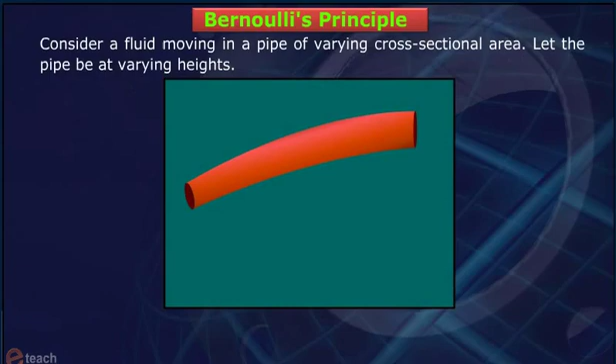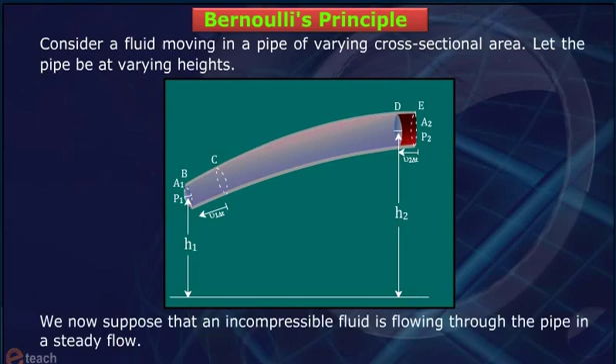Let us discuss Bernoulli's principle. Consider a fluid moving in a pipe of varying cross-sectional area. Let the pipe be at varying heights. We now suppose that an incompressible fluid is flowing through the pipe in a steady flow. Consider the flow at two regions, one that is BC and two that is DE.

Let fluid initially lie between B and D. In an infinitesimal time interval delta t, fluid which is initially at B with speed v1 has moved a distance v1 delta t to C. v1 delta t is small enough to assume constant cross-section along BC. In the same interval delta t, the fluid initially at D moves to E, a distance equal to v2 delta t.

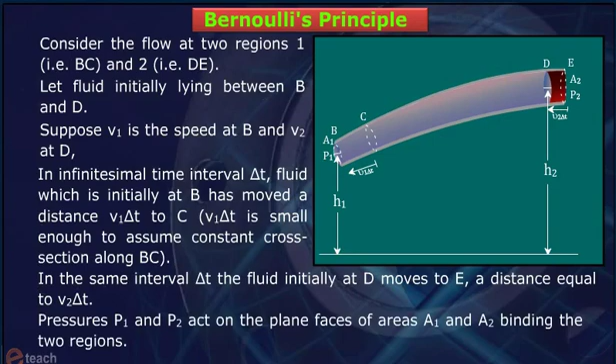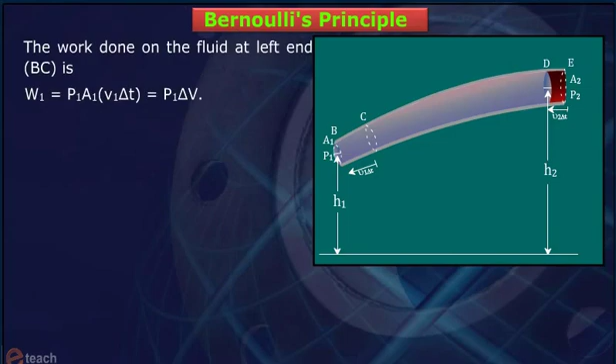Pressures P1 and P2 act on the plane faces of areas A1 and A2 binding the two regions. The work done on the fluid at left end BC is W1 = P1 A1 v1 delta t = P1 delta V. Since the same volume delta V passes through both the regions from the equation of continuity,

the work done by the fluid at the other end DE is W2 = P2 A2 v2 delta t = P2 delta V. So, the total work done on the fluid is W1 - W2 = (P1 - P2) delta V.

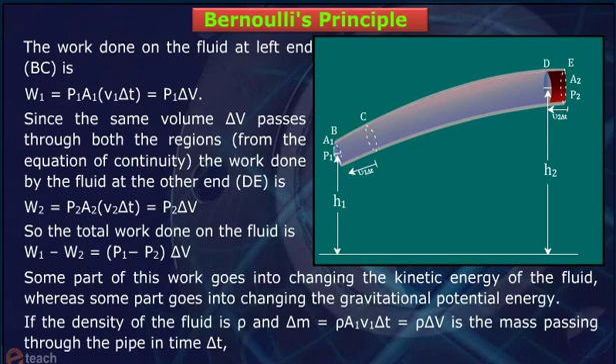Some part of this work goes into changing the kinetic energy of the fluid, whereas some part goes into changing the gravitational potential energy. If the density of the fluid is rho and delta m = rho A1 v1 delta t = rho delta V is the mass passing through the pipe in time delta t, then change in gravitational potential energy is delta U = rho g delta V (h2 - h1).

The change in its kinetic energy is delta K = 1/2 rho delta V (v2² - v1²). Using the work energy theorem, we get (P1 - P2) delta V = 1/2 rho delta V (v2² - v1²) + rho g delta V (h2 - h1).

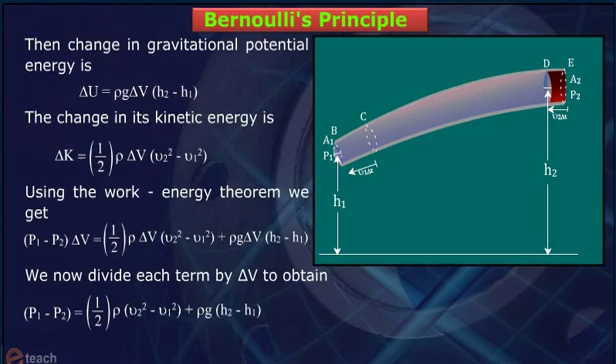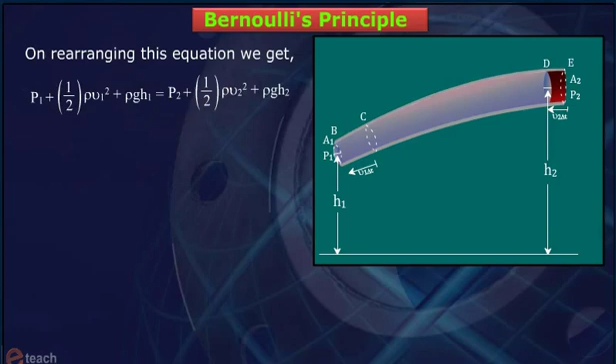We now divide each term by delta V to obtain P1 - P2 = 1/2 rho (v2² - v1²) + rho g (h2 - h1). On rearranging this equation, P1 + 1/2 rho v1² + rho g h1 = P2 + 1/2 rho v2² + rho g h2.

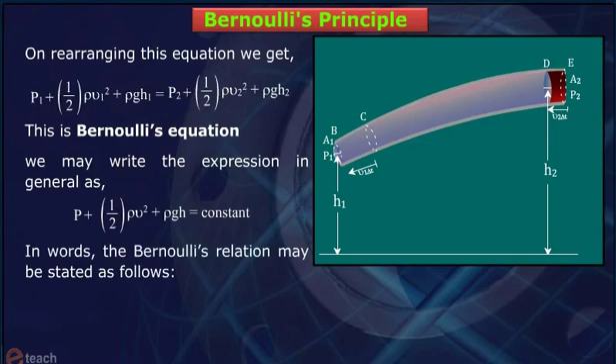This is Bernoulli's equation. We may write the expression in general as P + 1/2 rho v² + rho g h = constant. In words, the Bernoulli's relation may be stated as follows. As we move along a streamline, the sum of the pressure P, the kinetic energy per unit volume rho v²/2 and the potential energy per unit volume rho g h remains constant.

A few assumptions. First, there is an assumption that no energy is lost due to friction. But in fact, when fluids flow, some energy does get lost due to internal friction. This arises due to the fact that in a fluid flow, the different layers of the fluid flow with different velocities. These layers exert frictional forces on each other, resulting in a loss of energy. This property of the fluid is called viscosity.

Second is that the fluid must be incompressible, as the elastic energy of the fluid is also not taken into consideration. Third, Bernoulli's equation also does not hold for non-steady or turbulent flows, because in that situation, velocity and pressure are constantly fluctuating in time.